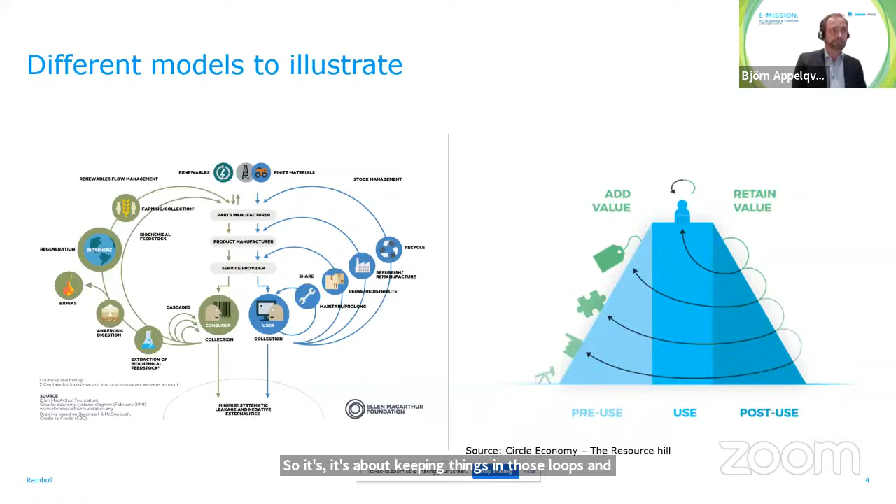There are a lot of models, really many graphs and pictures trying to illustrate the circular economy. One of the most famous ones is the one on the left, the Ellen MacArthur butterfly, which distinguishes between the biological loop on the left side and the technical loop on the right side. We have different approaches to reduce and bring materials back into our systems. So it's about keeping things in those loops and reducing the leakage at the bottom. That's one way of looking into it.

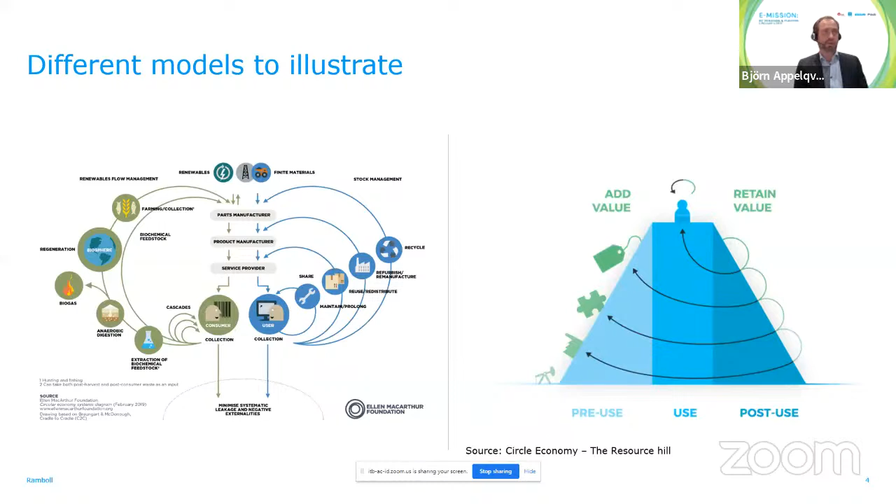I personally also really like the picture on the right side, the resource hill from Circle Economy, because it puts more emphasis on the value of keeping value in the system. We see we have a resource hill where we extract, we produce materials, we put more and more energy and materials into it, and add value for us as users. Then we have a user phase in the middle, and when we're no longer using our products, we're wasting them, and they go down the hill again and lose more and more of their value. So the trick here is both to make the use phase as long as possible, and then to try to capture things on the way down as fast as possible at as high a level as possible, thereby also reducing the need for materials and energy to keep them further in the loop.

It's also very important that at least the butterfly model shows, but this is also a more rough model showing that there are many approaches that can be used and have to be used in parallel to work with a circular economy. It's not about one or the other. It's neither, it's not neither nor, it's about having all of them. It's a continuum of multiple approaches that has to be applied to the situation we are in, and how further down we have gone through the processes.

But as you see here, we have the refuse, rethink, and reduce. It is pretty much about designing out waste, making decisions before we start producing something, and making the things we are working with more smart.

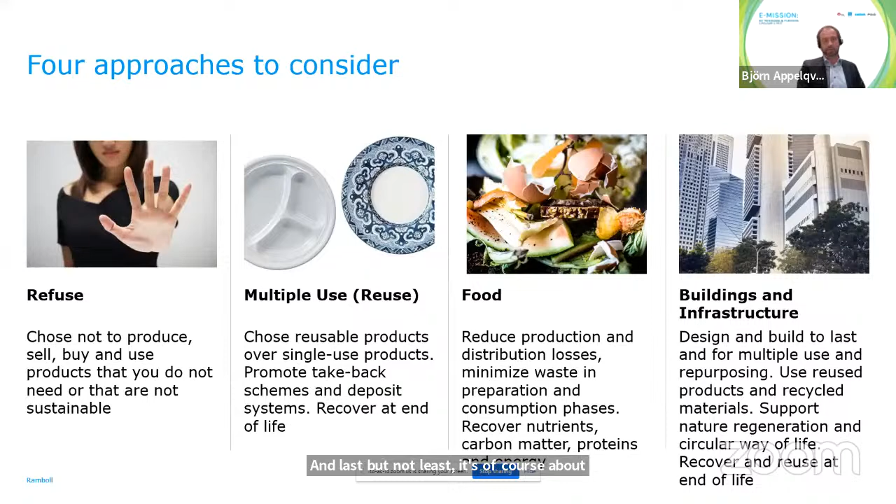And last but not least, it's of course about recovering and reusing materials at the end of life of a building as well.

Apologies here. So then we also could have a look at what is the role of municipalities and cities in a broader sense when it comes to supporting the circular economy.

Cities can in many ways be a promoter of knowledge instruments that are needed. It's about giving common understanding of what we mean by circular, to direct energy and resources in the right way. It's about spreading knowledge. It's about gaining data that can be used. It's about, and this is very much a role for the public sector, being the independent connector between different actors in the city, and also making sure that cities themselves are learning organizations that bring the concepts to them.

Circular cities can also promote and create demand for more circular models through public procurement.

And cities can, on the local level, work on legislation, can set an agenda and make sure that we have administrative standards in place. And a city can also, if it's proven successful, be a promoter of change in national legislation by showing cases and showing what can be done.

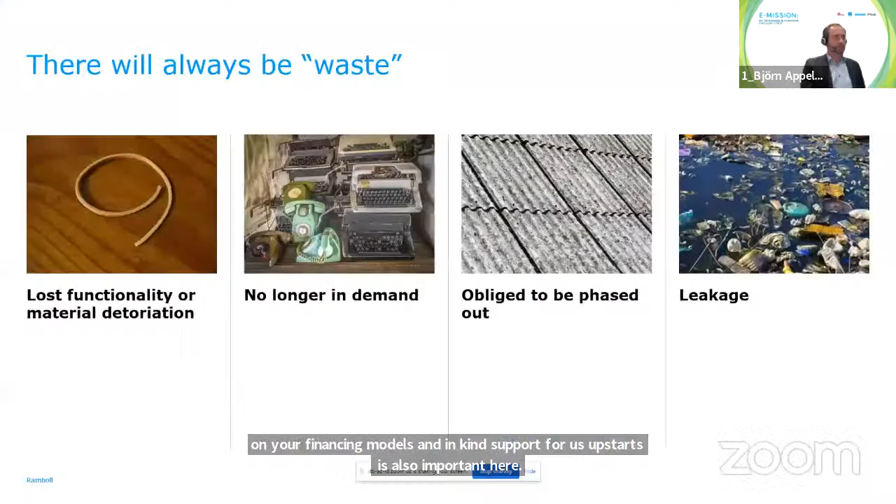Right, I'm going to go quickly forward and just bring a last message that I think is important here, and that is, despite that I think we should strive as much as possible to go forward, becoming more and more circular, we also have to acknowledge that there will always be waste.

The natural law says that there will be loss of functionality and material deterioration over time. There are things that no longer will be in demand. We will have materials that are hazardous, or that we no longer want to have in our loops, that have to be phased out, and there will be leakage.

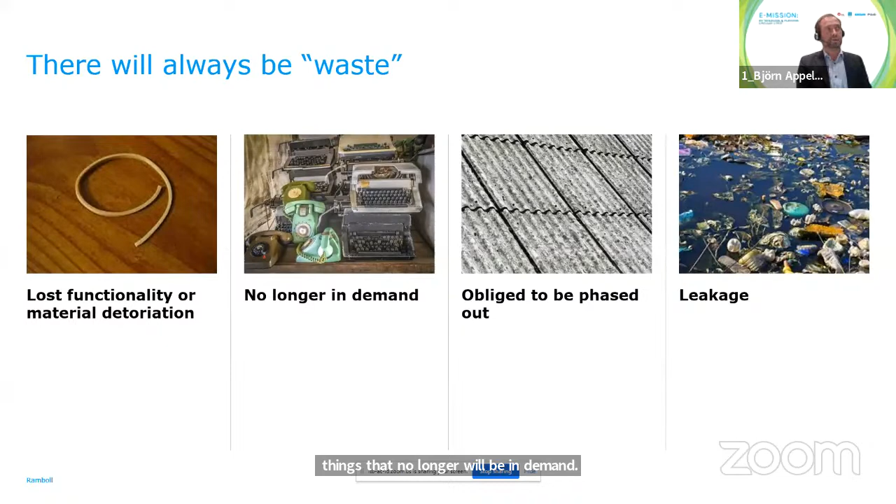So therefore I think it's also very important that we work in parallel with promoting a circular economy, but at the same time make sure that, through integrated sustainable solid waste management, we also take care of all the leakage that comes out from the systems, to protect our environment and mitigate climate change as well.

Even for Indonesia, we know there are going to be more people, at least in the short run, so there will also be larger demand for materials and larger waste generation over time. We'll have to keep in mind that we'll have to work on both ends of the rope, so to speak, both more circularity and more sustainable waste management.

And we all have a role to play along the value chains. There might be different approaches that are more important for some of us, whether we see ourselves as consumers, manufacturers or designers, retailers and sellers of products, or waste managers, but we all have an important role to play within the system. And it's all up to us.

By the end of the day, there are only two universal causes for things not happening. One is that we don't know what we have to do. The other one is that we don't want to do it. So together, we are the ones that can bring this forward all together. Thank you very much for your attention.

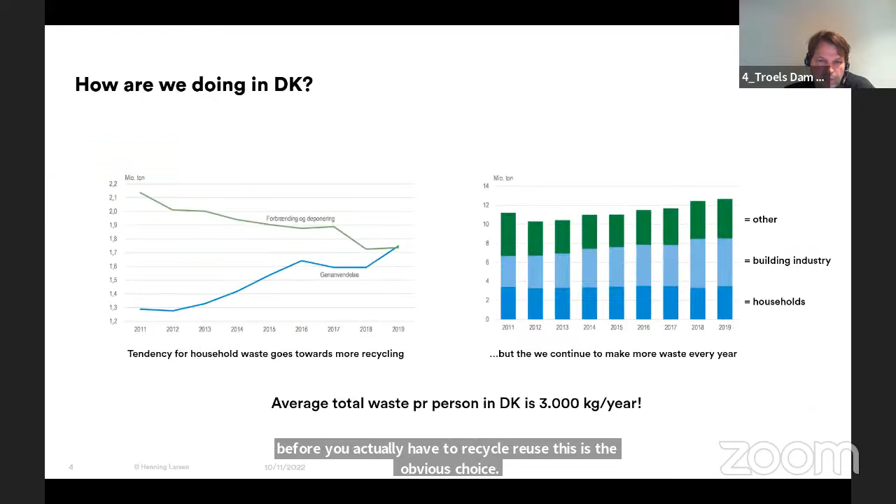So again, just to give you a little perspective on the state of things in Denmark, if you look at the whole waste numbers for the country, the tendency curve for recycling waste is going up, and this is for household waste. And the tendency for burning and putting waste to depot is declining. So that's good news. The bad news is that we still continue to make more accumulated, totally absolute numbers of waste year for year. And you can say the three categories are sort of evenly distributed between construction waste, waste from households, and other industries.

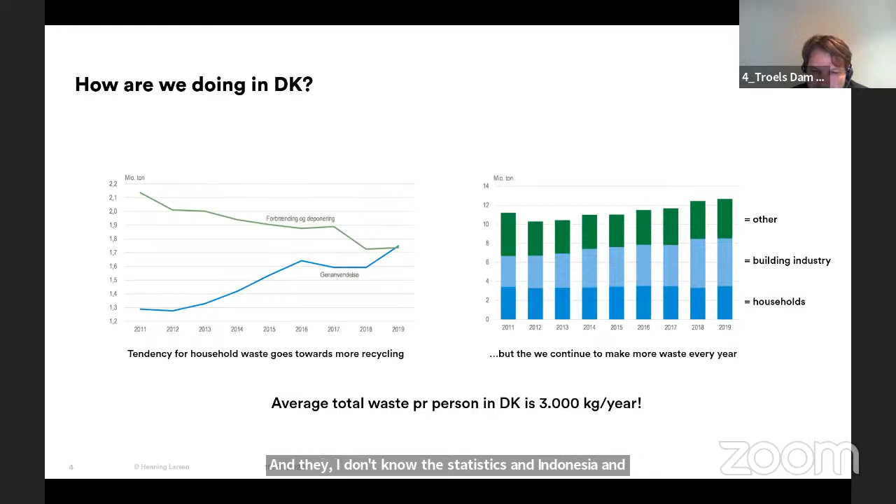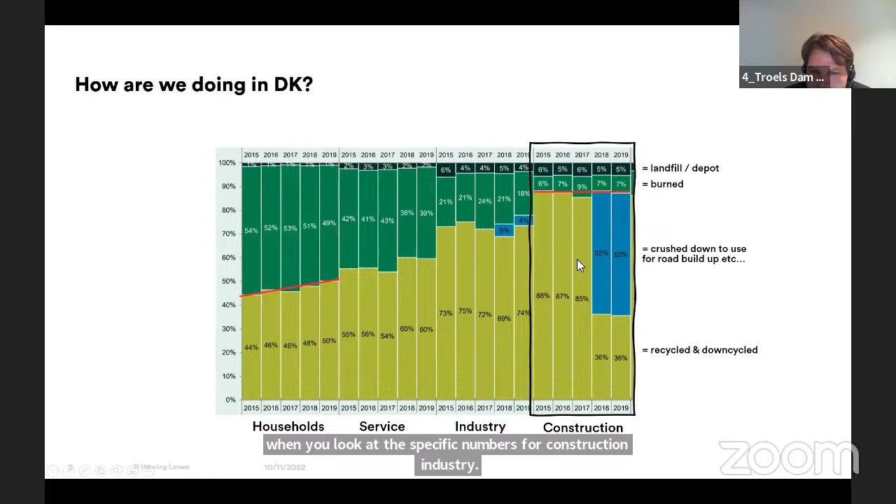And I don't know the statistics in Indonesia, but the standard is an average of waste per person of 3,000 kilos per year, everything included. So it's a vast amount of waste. Again, for household waste, as we saw before, the tendency is going up towards more recycling. But when you look at the specific numbers for the construction industry, instinctively it seems that we have a high degree of recyclability in construction waste. But when you look more closely into the numbers, a lot of it is, in my terminology, being downcycling.

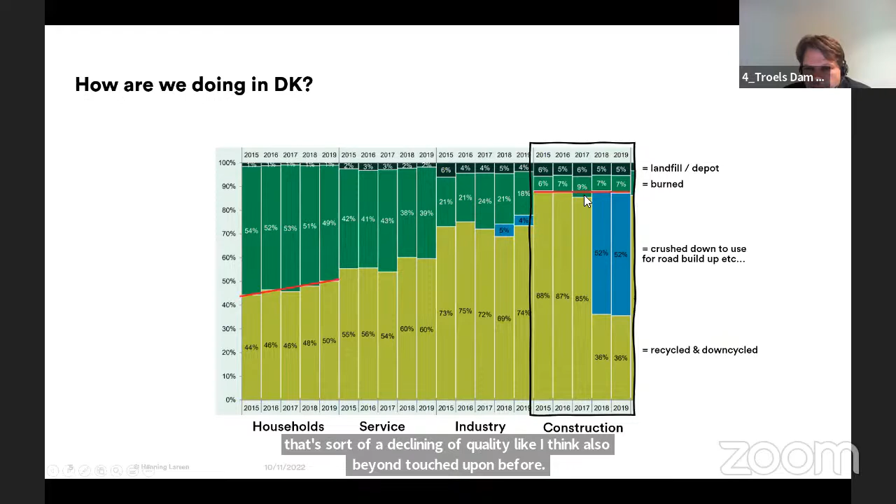That means that concrete and brick is being crushed and used for build-ups and roads. So that's a declining of quality, like Björn touched upon before. Another thing of concern is that the ratio of to what degree we recycle is flat, so there's not any improvement over the last 5-6 years.

A very high number that is really hard to comprehend is that we have 1.1 billion tons of construction waste globally every year. These big numbers are really mind-boggling to me. What does it mean? It's hard to relate to.

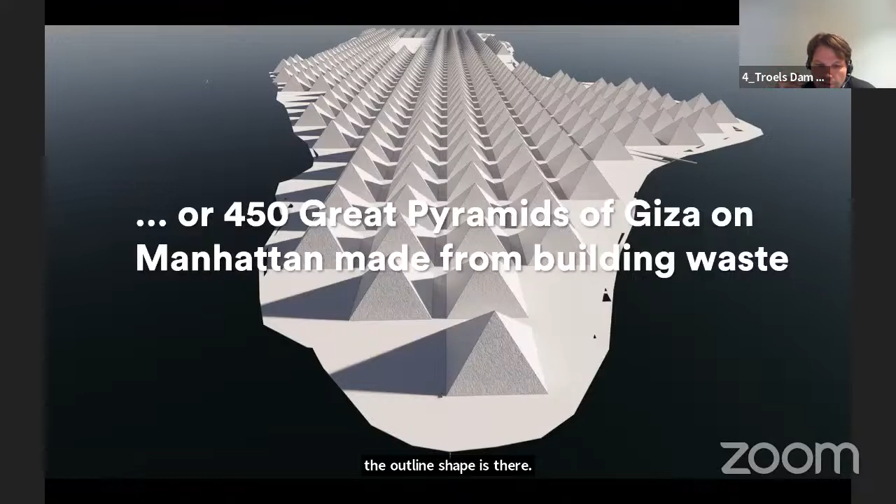So I tried to make some diagrams that make it more relatable. One year of construction waste globally would be the same as building 450 pyramids of Giza on the whole area of Manhattan, from the northern part all the way down to the tip.

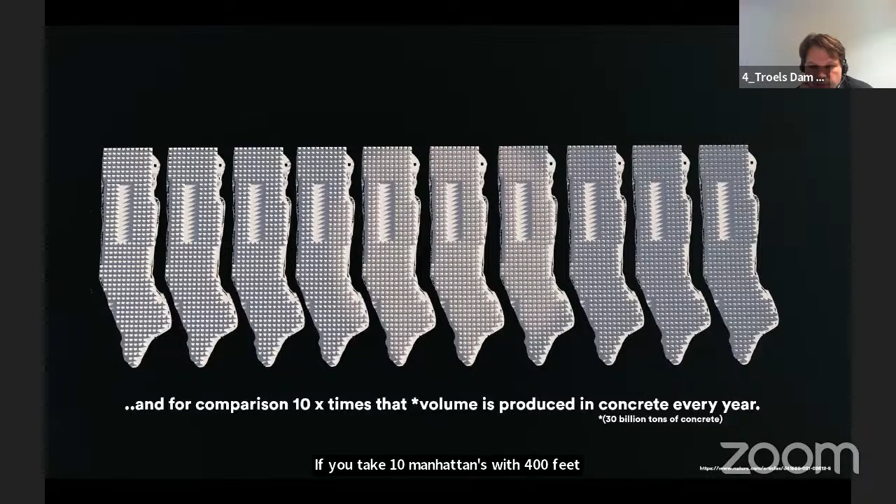To put more perspective on the materiality of new production, if you take 10 Manhattans with 450 Giza pyramids massively filled with new concrete, that's the amount of concrete the world consumes every year. It's underlining the enormous efforts we all have to do to bring those numbers down and use less, essentially.

The interesting part in Denmark is that the driver right now for bringing down emissions even further is coming from pension funds and big investment companies. They're setting their limits much lower than the government limits. The mechanism behind that is they rely heavily on investments in the stock market, and they want to chase those green investments that most pension funds require, having 5 to 10% of their portfolio in green investments.

So the people that build housing, especially in Denmark, are keen to be best in class, that's why they're low. Currently we have an ongoing project here in Copenhagen where we are down to 4 kilos of CO2 per square meter. It's obviously a wooden construction with a lot of low carbon materials associated to that.

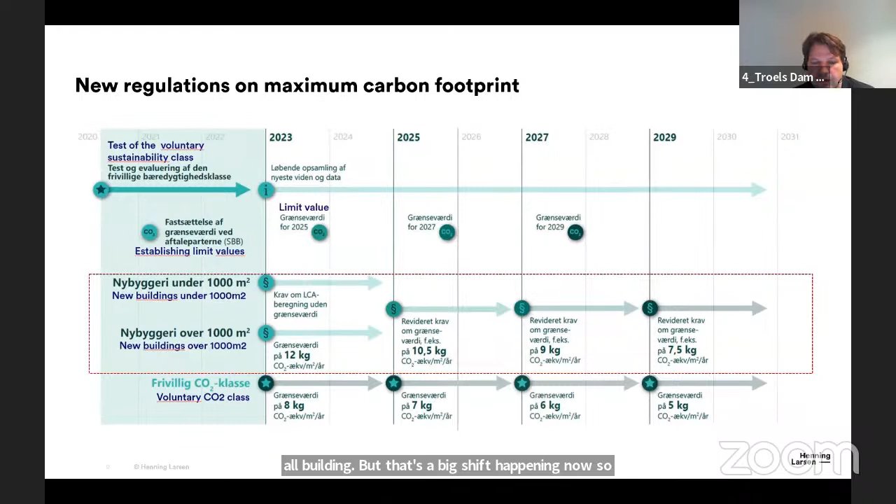So the rest of my presentation is on very hands-on pragmatic proposals we have done and are doing now on how to lower specific material use and use recycled material. Denmark is a brick country, the whole country is built on clay, so clay is everywhere and easy to access, and bricks are by far the most used material.

The only downside with brick is that it takes a lot of energy to make a brick in the burning process. For comparison, it's around 260 kilos of CO2 per ton for a brick wall, but a used brick wall is only 3 kilos. So obviously there's a huge potential in going for used bricks.

The problem with used brick, and I assume it's the same in Indonesia, is that after 1960 it turned from chalk-based mortar to cement-based mortar, which means bricks after that period cannot be disassembled without damaging the brick, something they obviously didn't think about in the 1960s. But all brick before that period is very easy to take out and reuse.

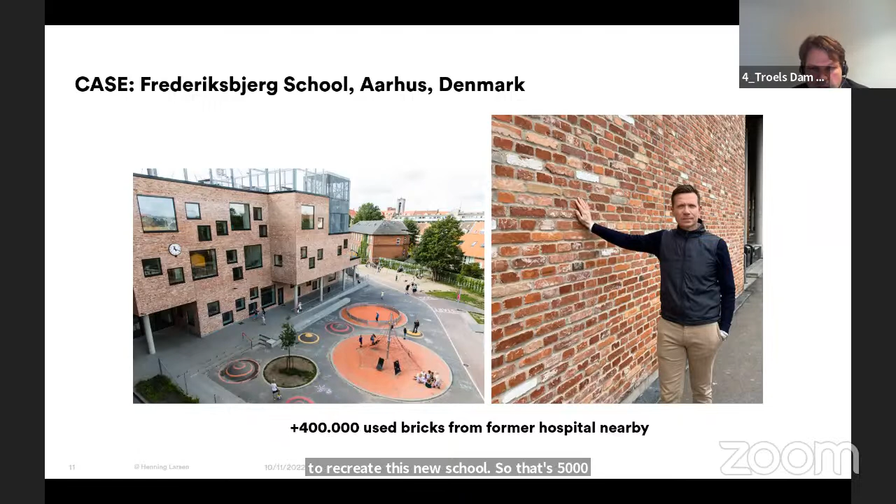That's what we specifically did for a big public school in the second largest city in Denmark. A nearby hospital was up for demolition and repurposing, and all the bricks from that project were used to recreate this new school - 400,000 bricks directly reused, contributing to lower CO2 emissions. Another theme of bricks in Denmark is obviously roof tiles.

I saw some of your previous images, so it seems like it's a similar thing in Jakarta and in Indonesia.

There's a lot of brick roofs in Denmark, and the brick often has a much longer lifespan than the building itself. An example of that is a project for a housing agency in the third largest city in Denmark, where those houses have to be demolished because of mold problems.

So they were constructed very poorly, but the actual roof tiles are doing really great. We are doing testing now at a Danish Technological Institute, and it's pretty mind-boggling. They have estimated between 80 and 120 years of remaining lifetime in these bricks. So we have a specific project for the same client that is demolishing these houses, and we suggested them to use all this roof tiles as the new facade material.

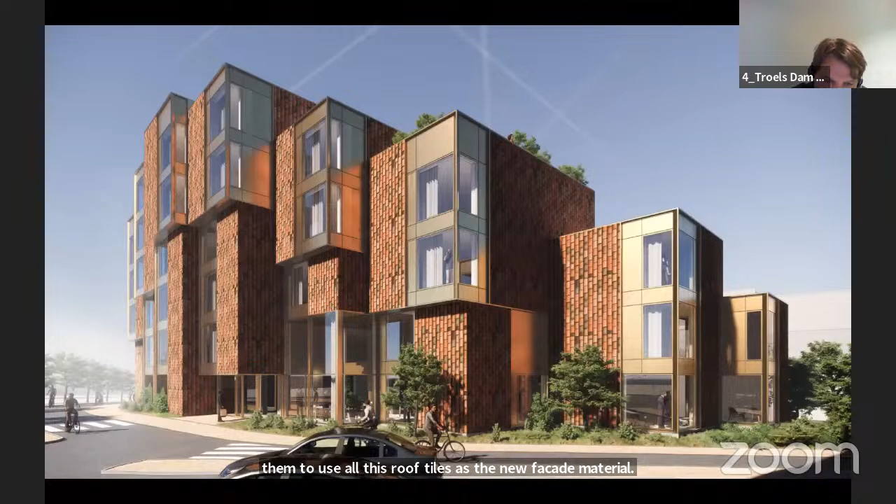This is the sort of render of the future project to be, but we focused on bringing in the aesthetic qualities of this recycled brick, combined with some new materials like anodized aluminium. So there's a lot of new ways of designing.

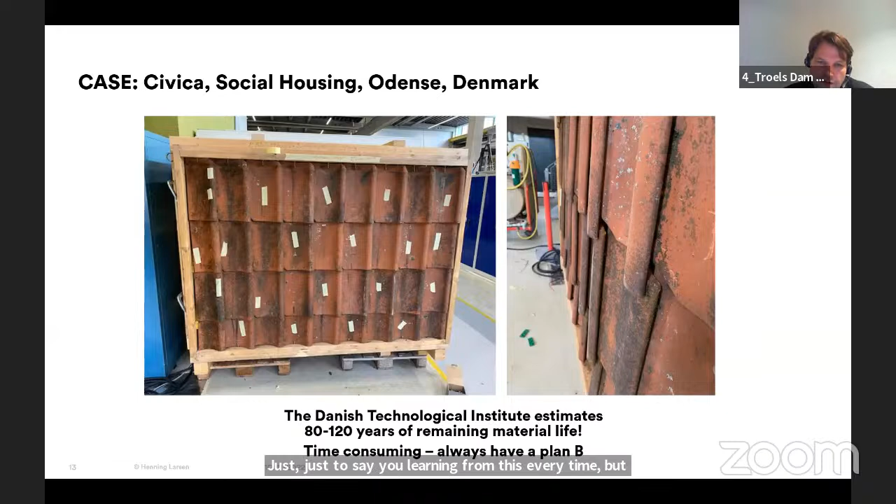If I go back to the previous slide, the whole work of getting from knowing these bricks were here to the testing and to the real project has been a huge time-consuming process, because you have to align the whole value chain, from the client, the insurance company, the testing facility, and the contractor, and who's responsible for that. We're learning from this every time, but it's a big challenge, and it takes a lot of time and effort to actually succeed. It's much easier to go and buy a virgin product, but we are fighting for it.

So now moving on to wood and some examples for that. We have a recently completed office building here in Copenhagen, where we tried to see how much we can introduce upcycling or recycling.

I just took this picture from inside the building. A lot of the furniture and all the pendants and lights are coming from the old premises where the client was sitting before. Traditionally you just take everything out, but here we tried to keep as much as possible.

On a specific note, all the interior partition walls and glass walls are made from small pieces of waste wood profiles. This waste wood is something normal wood production uses for making furniture and floor elements, but there are always some small elements left over. So we actually made a design out of putting all these little pieces of wood together, and that's all the wooden partition walls and doors you see in this picture.

Another very specific project just concluded this summer. Fritz Hansen is a big furniture producer here in Denmark, and they wanted to stage their 150 year anniversary as a furniture producer. So they made this 3-day design event in the center of Copenhagen in a museum garden, where we designed and built this pavilion for them.

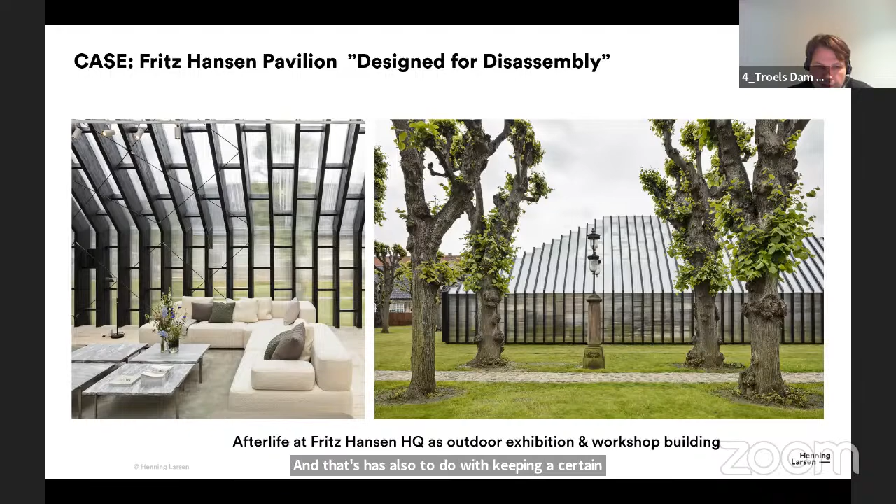So that's a hands-on learning process on how to set yourself the goal of making everything reusable. That has also to do with keeping a certain simplicity and rhythm and repetition in the profiles and the use of them.

Another example of wood is a school underway in Trondheim, Norway, where there was an existing building that has to go down, and a lot of that was made by these glulam beams. So there was a small exercise on actually recycling all those as the floors for the new building. Essentially, you can see here the glulam beam is being cut into lengths of wood.

And this is essentially going to be laid down as the final floor for the whole new school. So it's also very hands-on, just to keep the material on the premises.

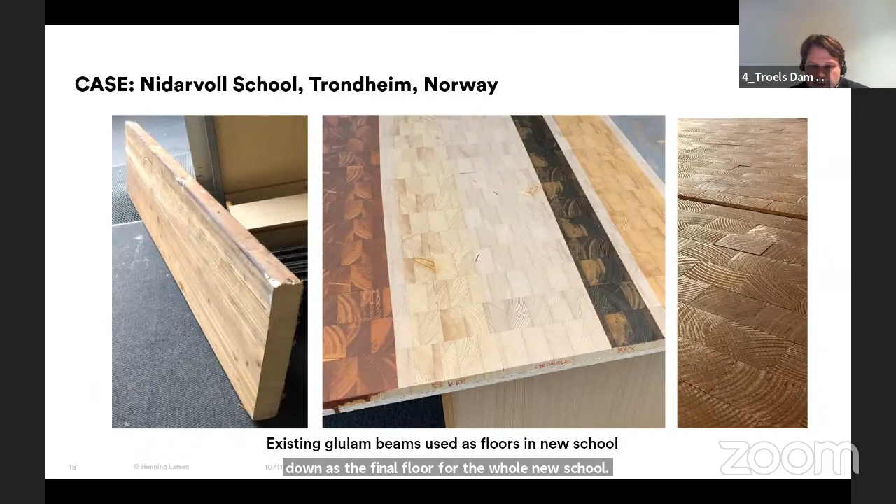So we have another ongoing research project, which is to do with upcycling waste wood from the construction industry to CLST elements, but with secondary timber. Colin Rose, who's the man behind this study, has done research from the UK showing that almost 500,000 tons of solid wood is wasted in the construction industry every year. So there's a huge potential. He estimates up to 10,000 houses could be built just from the recycled wood.

They're doing testing, and the learning so far has been the need for testing, because it's not a virgin new material you can give guarantees on. You need to test all elements, but they have developed acoustic measurements, so it's a very speedy process to verify every single piece of wood is still performing structurally. They have good results on that, but the main driver here is the testing, and also the time spent collecting the wood and putting it back together.

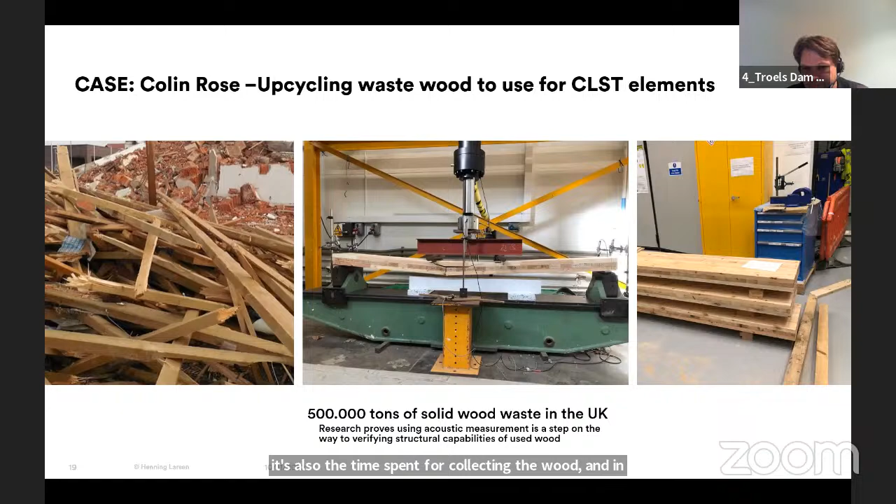Then I have a project that is also underway. It's a small demonstration pavilion for how far we've gone in using concrete. There's a lot of partners involved, producers of concrete, and also the testing facilities.

There's a little echo somewhere.

So we're demonstrating a double curved in-situ cast shell where we'll have only 80 millimeters thick concrete to put the pressure from the shell out to a ring beam. Then we have a direct recycling theme, taking existing paving stones from the courtyards of Danish houses and giving them a new life. Then we're demonstrating how to 3D print hollow columns, custom hollow columns. I'll show you pictures of that.

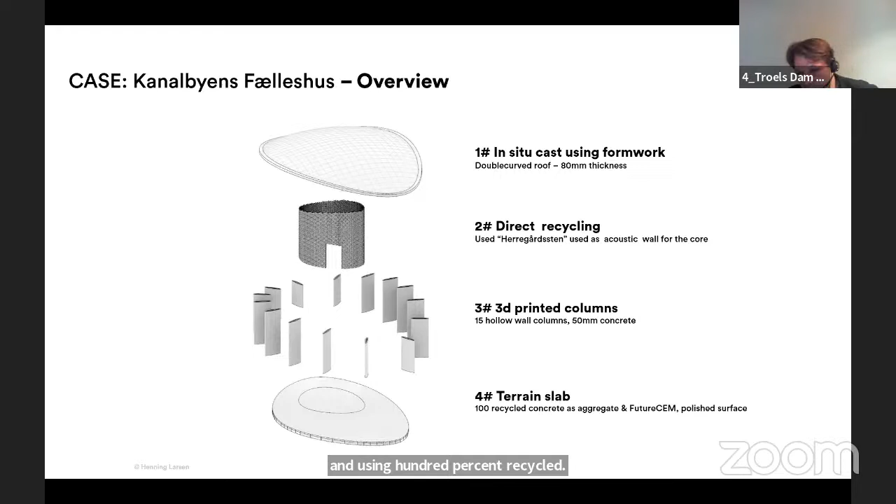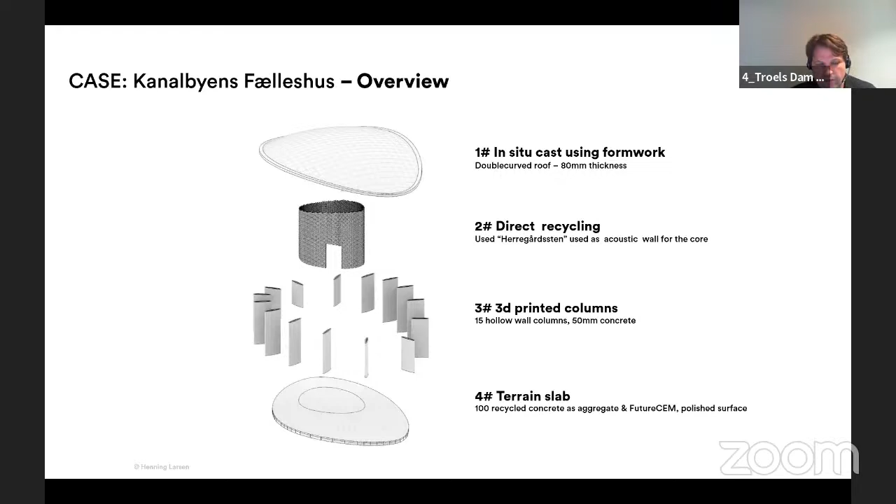And then terrain slab will see how far we can go using 100% recycled concrete aggregates instead of virgin material. There's a product called FutureCEM, which contains more calcinated clay than calcinated chalk here in Denmark. So it's a step on the way to using less carbon footprint for the cement, but it's nowhere near the goal yet. It's just a state of things.

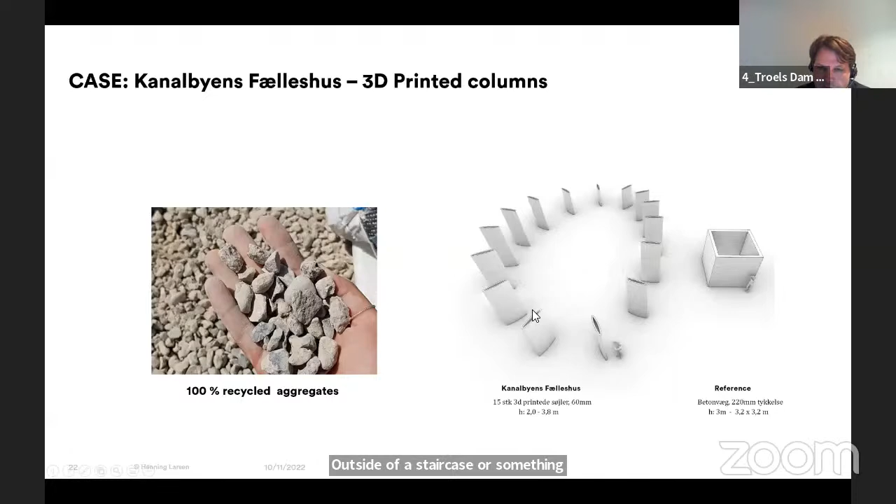So just some more reference images for that. The hollow columns that we print will use the same amount of material as the reference here, which is a normal sized small core wall that you would do outside of a staircase or something like that. So we're trying to make the most of the material use by actually using 3D printing technology for the hollow column elements. And here's some first generation tests of that.

Most of you have probably seen 3D printing before, so it looks much more coarse here. The reason for that is that we're printing with actual concrete and not mortar. When you print with mortar, you're using a higher degree of cement, and that's what we want to avoid.

So the CO2 footprint per cubic meter, I think you saw a figure before in the previous presentation, around 400, which is the industry standard. These columns are down to 200, so it's essentially half of that footprint. So it also comes with the challenge to the manufacturer, with a lot of fly ash in the mix to bring down the overall CO2 emissions.

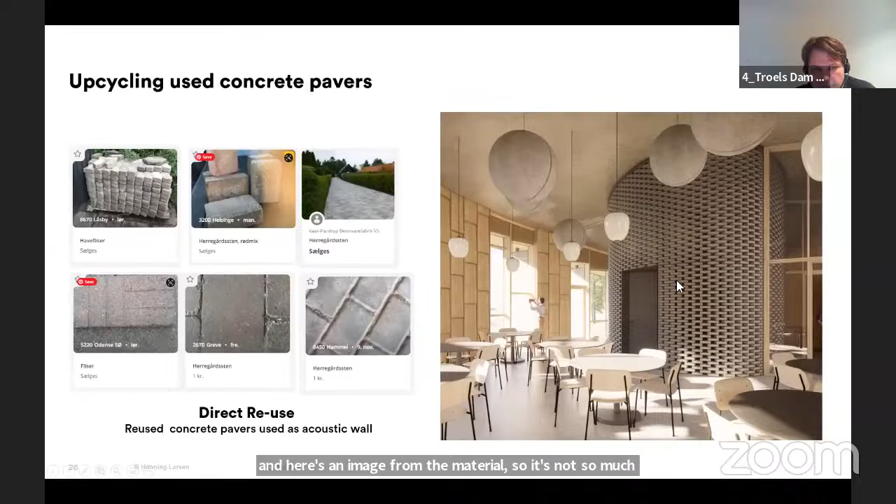So the last topic I want to highlight is what we see very much happening in the industry: a lot of new platforms for facilitating the accessibility of used materials are popping up, and they are constantly improving.

There's one web platform called Genbyg in Denmark, which means rebuild, where you can go in and search for what kind of material you're looking for. It's essentially a big warehouse that holds all this recycled material. The challenge here is that the amount of material we actually want is very hard to find. For smaller projects, it's fine, but for larger scale production, it's really difficult. So that's a challenge, but recently the person behind this has been acquired by one of the big construction companies.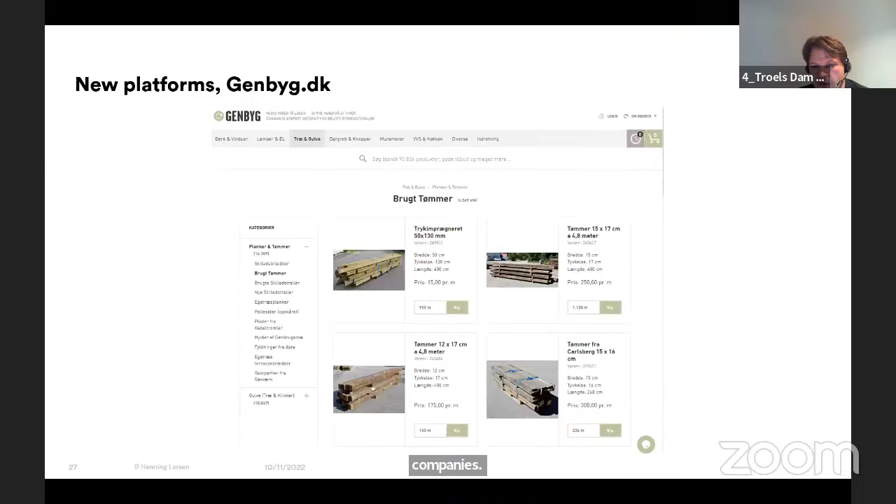So their mission is absolutely to scale the amounts up. So that's really positive news.

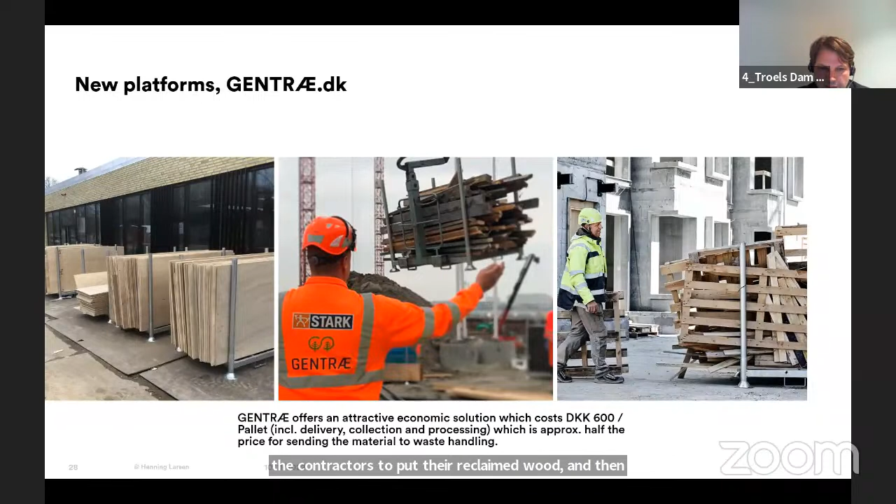The last initiative I want to highlight is a Norwegian platform called Rehab. It's essentially a more advanced platform than the previous one I showed you. Here you also get advice on how much CO2 you can save, plus more legal advice on using reclaimed materials and how responsibility plays out in the end. There's a lot of potential here. The platform right now only has a few example projects, but the perspective behind it I find very interesting.

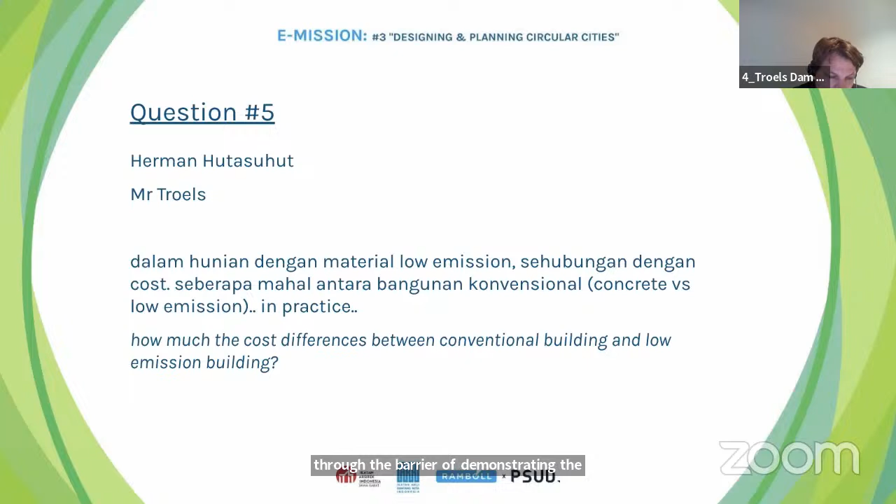All in all, it's a 20-30% margin we're looking at for that specific product, and the client here is NREP, the biggest real estate developer in Denmark by far. They know what they can and want to pay, but it's an interesting case for us. I didn't include it here because we're focusing very much on circularity and reuse of material, but that case is one that will break through the barrier of demonstrating this can also be competitive. Of course there will be a cost premium in the first generations, but this will decline once production goes up on these alternative materials.

The calculation will be different from one case to another case, I guess we cannot make a very generic estimation. Thank you so much. So do we have time still, or will that be it for the committee?

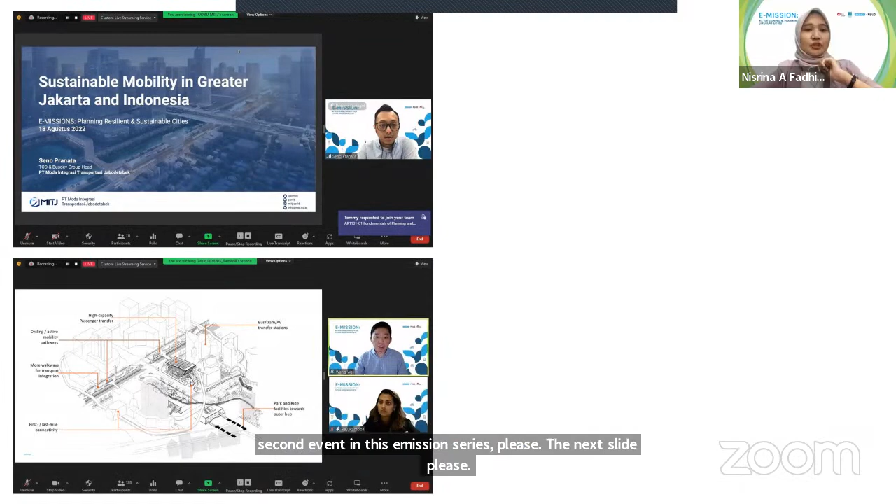And we also had our second event in this E-Mission series. This is still from the first event. The second event we held offline in Bandung with our partner as a speaker from Kementerian Pekerjaan Umum dan Perumahan Rakyat, Ibu Diani Rawati. Thank you very much to all of our speakers from the first session, the second session, and until the third session today.